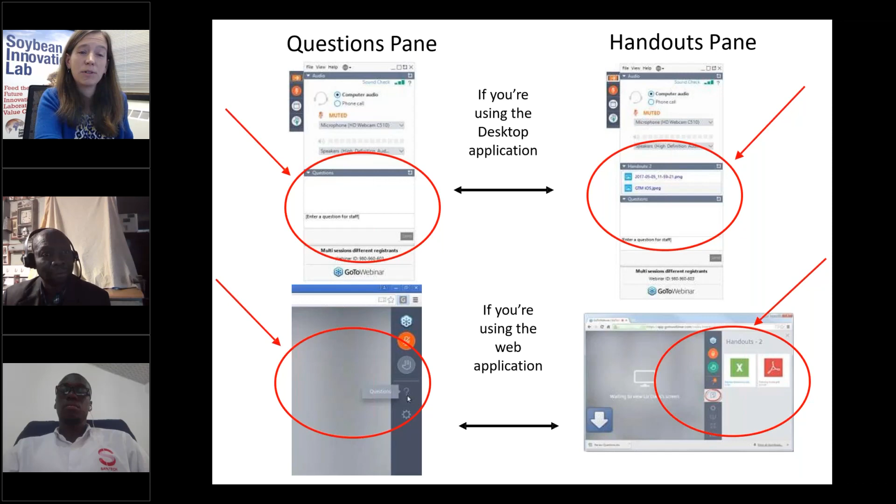Right now, I'd like to give a quick introduction of today's panelists before beginning the webinar. First, we have Mr. Jeffrey Appiah. He's an agricultural engineer and the designer of SIL's multi-crop thresher. At only 22 years old, Jeffrey is changing the face of agricultural mechanization, education, and training across Africa. He is the founder and CEO of SAYeTECH. He works with the Soybean Innovation Lab to create and provide training programs for young engineers, equipment fabricators, and vocational schools to enable the local manufacture of the SIL multi-crop thresher. Thank you for joining us today, Jeffrey.

We also have the privilege of Mr. Henry Kizito Musoke joining us today as a panelist. Henry is the CEO of Soya Solutions Eastern Africa Limited. He has over 20 years of experience working with local and international NGOs, managing human development programs in Uganda. Mr. Musoke has dedicated much of his time to working with small and medium holder farmers to increase their productivity and provide them with better access to markets. His passion for soybean as a nutritional crop for humans and animals led to the founding of his company, Soya Solutions.

Welcome, Henry. Next, I'd like to introduce you to Dr. Kerry Clark. Dr. Clark is the director of CAFNR International Programs and an assistant research professor with the University of Missouri. She has an MS degree in agronomy and PhD in soil science. Kerry is SIL's principal investigator for grain and seed quality and leads all mechanization efforts. In this role, she teams up with in-country development organizations to design and implement customized training workshops and multi-crop thresher fabrication across sub-Saharan Africa. Thank you for joining us today, Kerry.

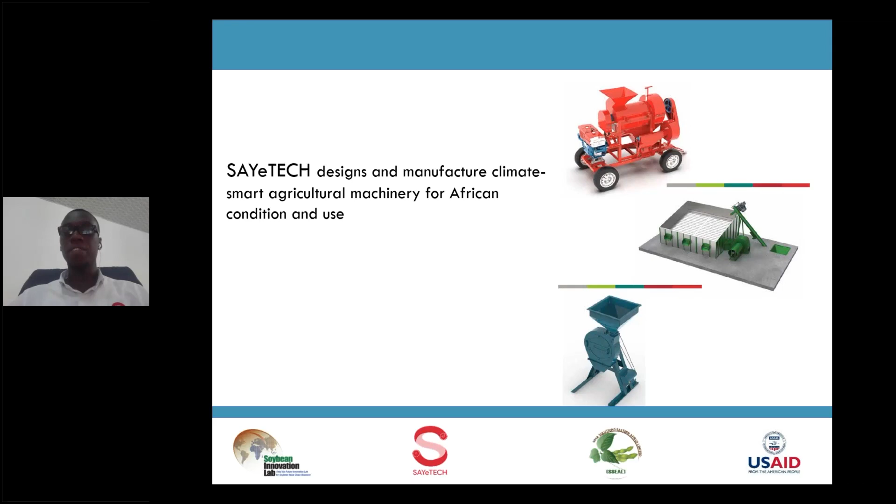So at SAYeTECH, we design and manufacture climate-smart agricultural machinery for African conditions and use. And working with the Soybean Innovation Lab, USAID Soybean Innovation Lab, we've been able to develop a number of agricultural machinery. There's a thresher, dryer, and hammer mill for poultry feed processing. And we have others in the line. Next slide.

So it all began with a passion for solution. I was in school when the USAID Soybean Innovation Lab had a competition for thresher designs, and I had a passion to design and make an impact. The goal was really to help women thresh crops. Now we have a multi-crop thresher, and that's how the SIL story began. Just a passion for solution, and then we make big impacts.

After school, after these designs, I served in a rural community without electricity, and that was where I saw the challenge firsthand. I served as a primary school teacher for one year for my national service in Ghana. I realized the problem was not only limited to women threshing by beating with sticks, but it also took away children that I taught in school to go work on these farms. The most drudgerous activity they did was also threshing, because threshing needed to be done timely due to the associated post-harvest loss if you don't thresh in time. I got the inspiration from the field to focus on the thresher and to make sure we scale it across Africa. That was one of my main inspirations.

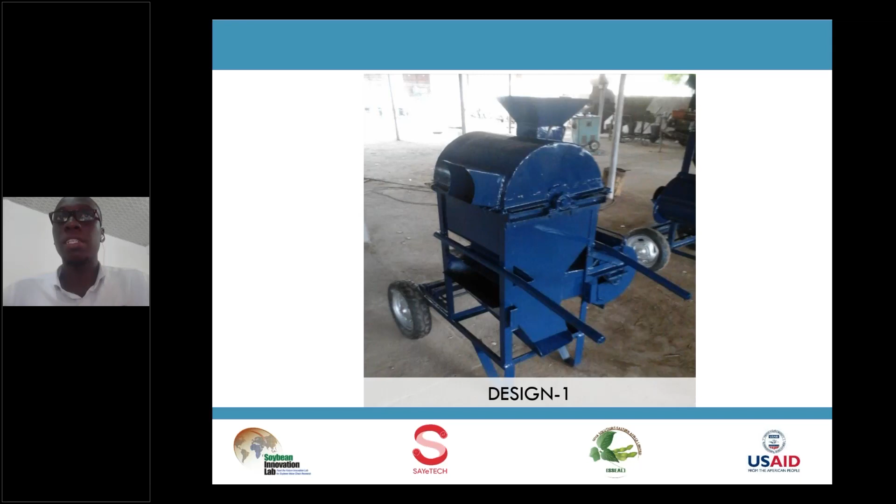So we went ahead and dropped this model and came up with the next thresher. We started with the MCT 1.0, which had a few challenges. One critical issue was that it was very fast, but it threw grains out. When we got this feedback, we developed the SIL 2.0, so it wouldn't throw away seed, but that reduced the capacity mostly for soybean. Then in March 2019, when we were testing in Tanzania, we realized that for some Tanzanian grains, which were much bigger, it wasn't cleaning perfectly. So we added an extra suction to it, and we keep developing along the chain to make it more multi-crop and more functional for African countries.

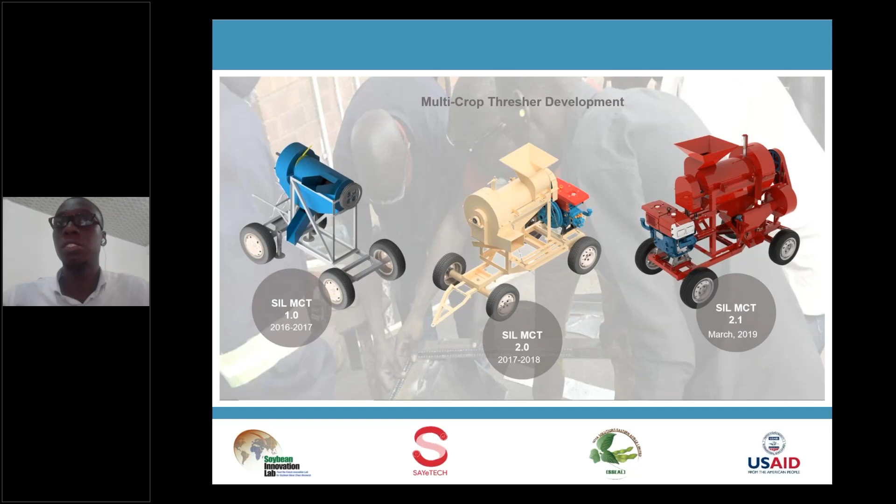Our thresher can thresh maize, soybean, beans, rice, wheat, barley, common beans, pigeon pea, groundnuts, and other crops. For groundnuts, for instance, you need to change the sieve completely to one made with rods, and reduce the threshing speed to about 200 RPM. But for it to be multi-crop, you need to change the sieves to the size of the grain—bigger grains need bigger sieves, smaller grains need smaller sieves. These are also part of the multi-crop thresher.

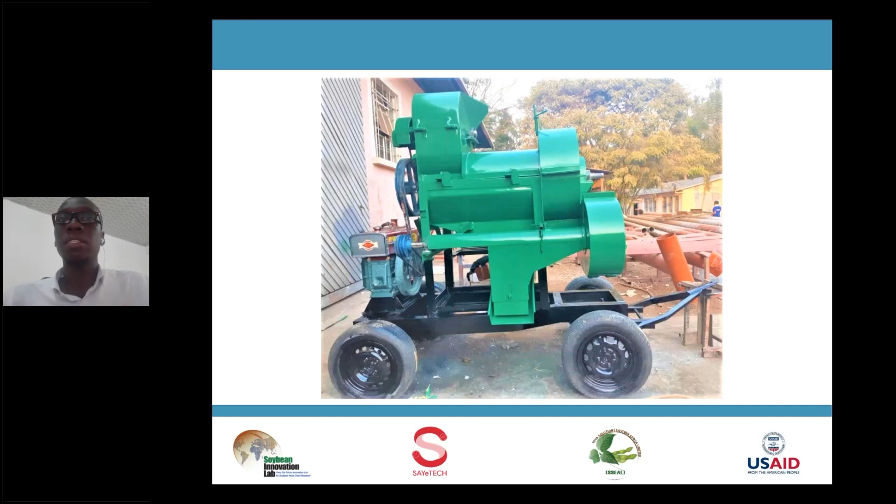Just in August 2019, we built this thresher. When we did a modification on the previous threshers, we reduced the threshing capacity of soybean to about 300 kg per hour. But we've added a new improvement in August to now increase it to about 500 kg per hour for soybean, and that's what we're currently working on, scaling it up shortly. This is the current design coming to the market, and it's what we're using for the trainings.

So the thresher is about 2 meters tall, 1.65 meters long, and 1.1 meters wide. With this, it's good enough for medium to large scale farmers, and can be pulled easily with a motor tricycle.

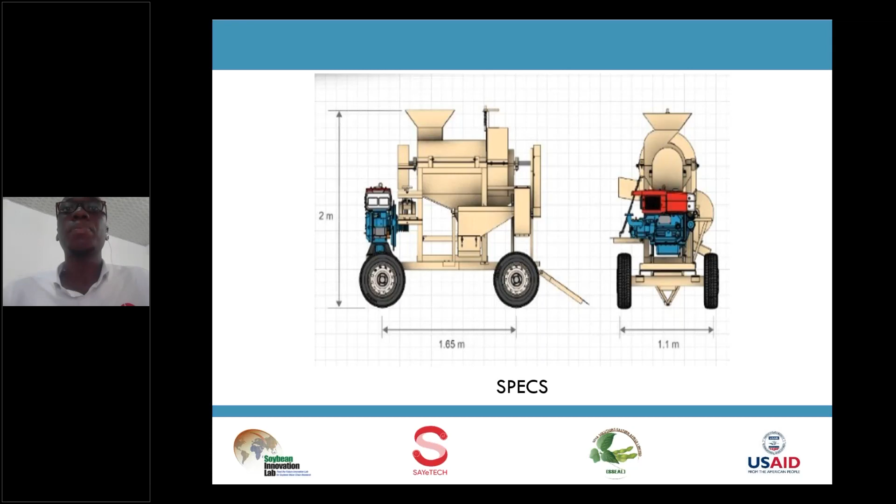So our thresher is powered right now by a diesel engine. We care about sustainability a lot, but this is the solution we have now. We're gradually moving from here. But it's also powered by just 2 gallons of fuel for an 8-hour run.

And for maize, running on the minimum speed, the least speed possible, you should get about 1.5 tons of bag per hour. And for soybean, it's 300 kg per hour. For sorghum, rice, millet, it's about 1 ton per hour.

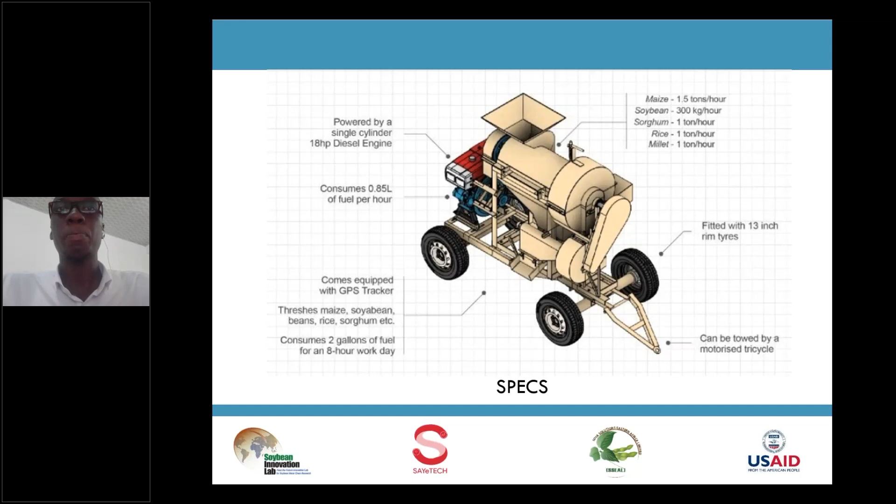Looking at our functional parts, it comes with an engine, which is an 18 horsepower engine as said earlier, and then the feeding of the crops is done through the hopper up there. Right now it comes with 2 sections.

So we have the very first fan that, after the crops are threshed, cleans it well, and then the secondary section also does extra cleaning to make sure we have very high quality grains that meet market standards and are easily purchased by buyers.

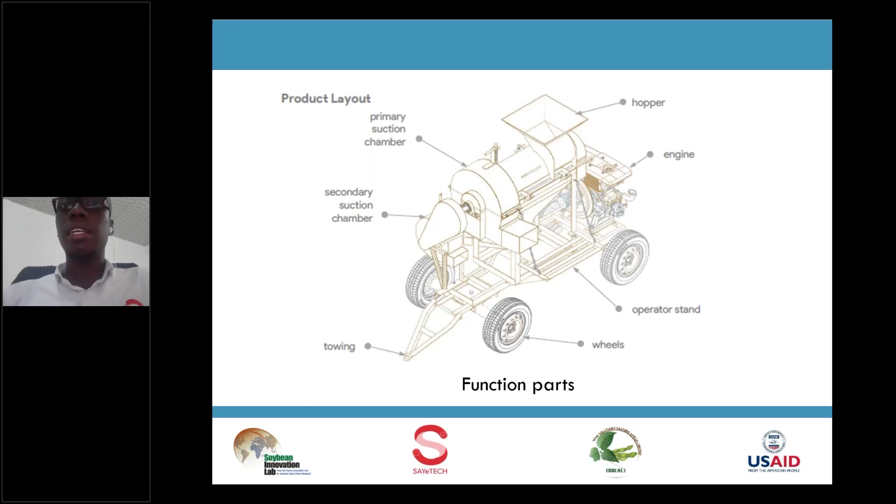So we have on point 5 the tow. Our thresher is towed by a motor tricycle, can be towed by a motor tricycle, and easily be put to wherever our farmers are.

If you look at point 3, it's where the operator stands to feed into the thresher pretty easily. And with this, the youth that operate these machines are our targets, so we design it according to the average height of the youths across Africa.

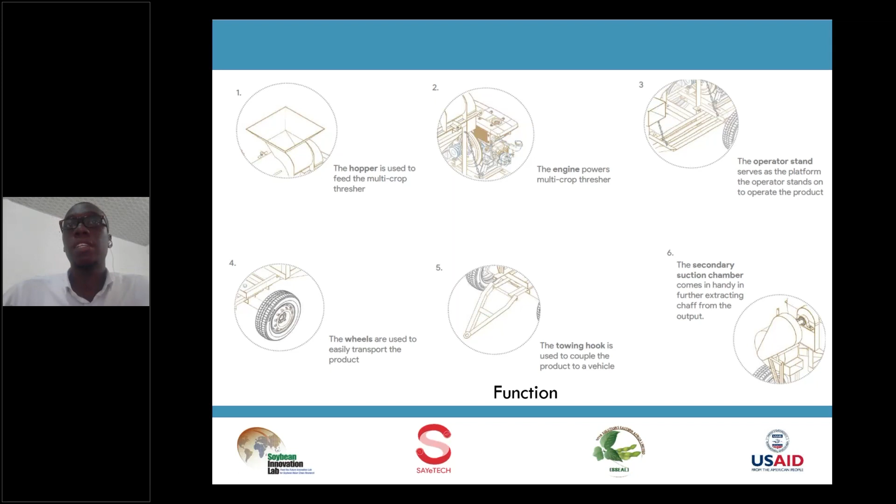So if you look here, you would see the suction adjuster. One thing we have done is that when you are doing different kinds of crops, you would need to adjust the suction, because with some amount of speed, you may lose seed. But with this adjuster, you can close it up to have up to 0% loss of grain through the suctions.

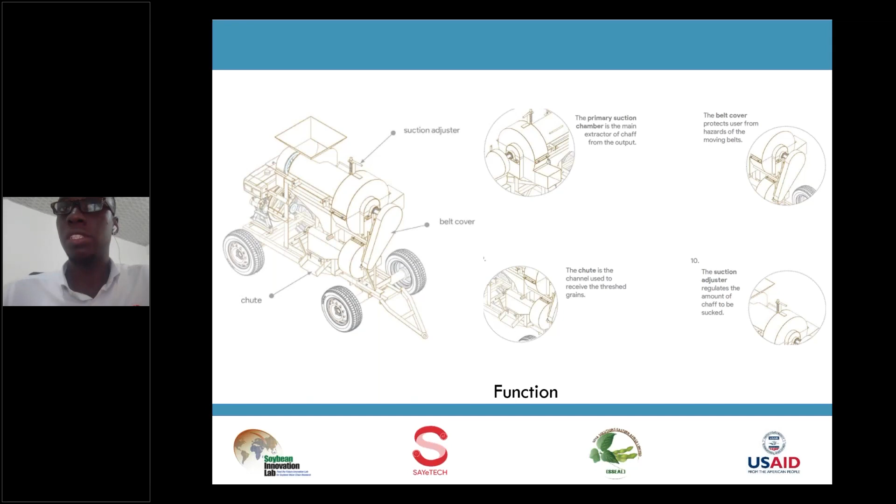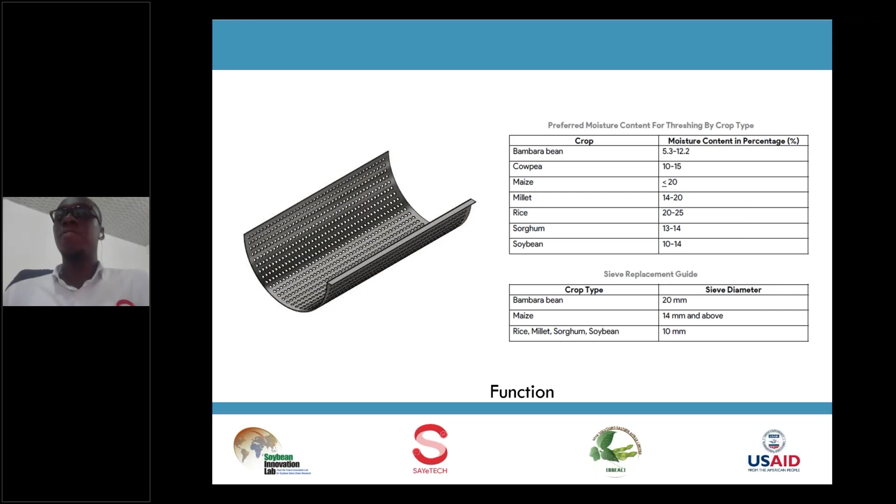As said earlier, we need different concaves for threshing. But another critical thing is the recommended moisture content for different grains. So these are the moisture contents that are recommended. However, we have done test trials, especially with maize that was over 32% in moisture content, and it did work perfectly. But these are still what we recommend.

Also with the sieves, as I said earlier, the bigger the sieves you use, the bigger the holes for the grain. So you could just look at the grain and say, hey, my grain looks big, this bigger sieve would do. So the sieves that come with it, you just select for it. And for maize, typically, we go with a 14mm sieve.

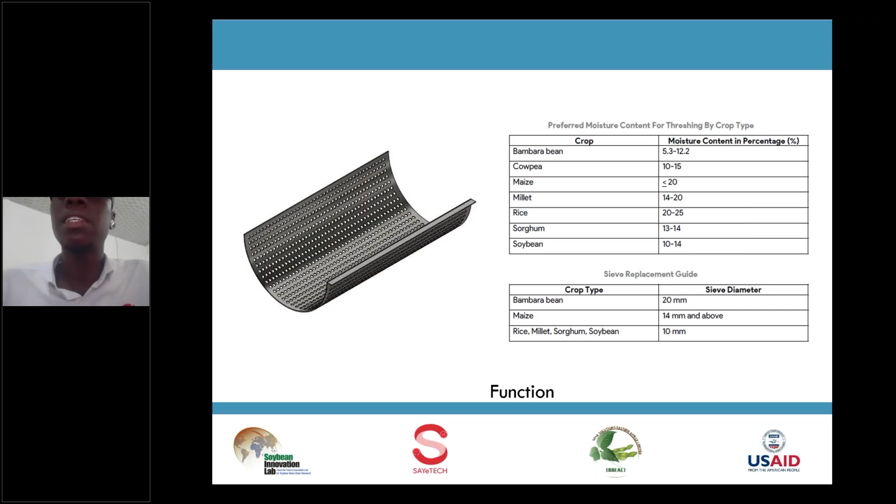Soybean is 10mm. So I spoke about our new addition to add on for more feed, and this is how it looks like. Very soon, when this is ready, farmers would be able to do about 500 kilograms of soybean per hour, and hopefully even reach up to 700 kilograms of soybean per hour, creating more food and bringing more nutrition across Africa through soybean.

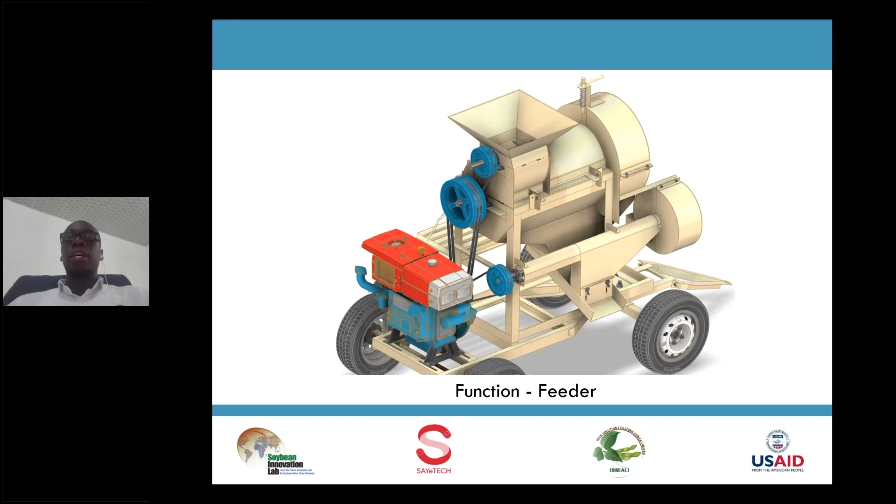So at SAYeTECH, we have a production, and I'd love to show you our production now. So this is how our machines look like when you purchase from us in SAYeTECH. We focus on quality and standards, so we make sure that we use the right materials for durability and for the African context.

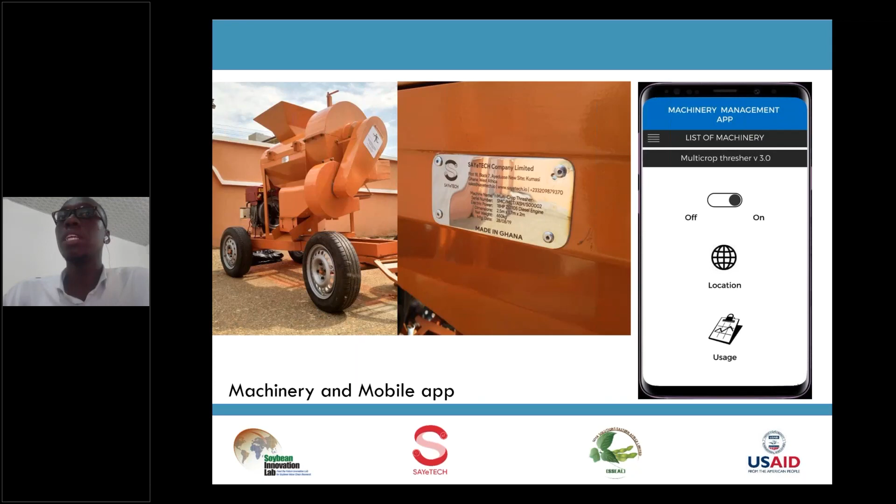We also have an app that is designed for the service provider, because we know that it's the service providers that we reach to who form businesses with these threshers and reach out to hundreds and thousands of farmers per season. So we are coming up with this app for them.

Now with this app, the service providers will have very good control of the machine, to be able to turn it on and off, to find its location, and to find its usage data. The data will be the first real yield data collection across Africa, and we'll be using it to track grains so that we can know, putting in AI, the trends of agriculture in Africa in terms of productivity and in relation to mechanization.

Now, this is also a very good tool to engage a lot of youth in the cities to be involved in agricultural mechanization and to promote agriculture across Africa, and helps the youth to work back with farmers.

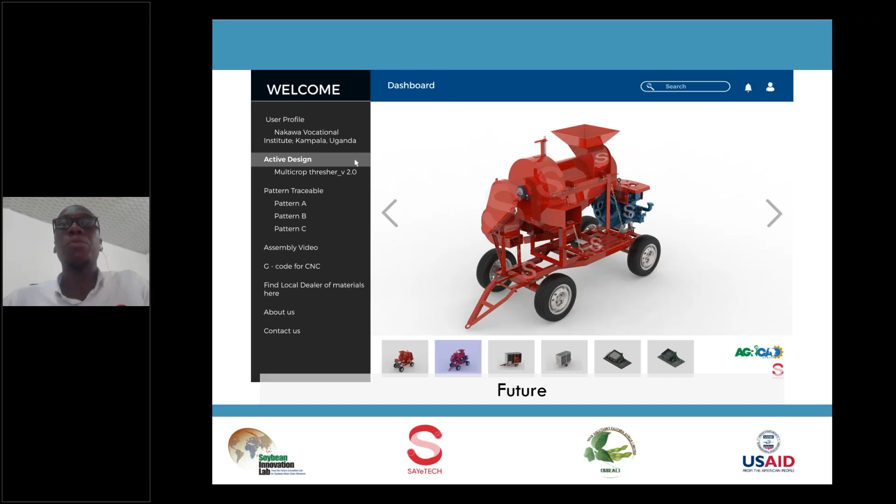In the near future, just as we've done with the Soybean Innovation Lab to do trainings, we want to come up with a web app that will teach a number of youth, specifically youth in technical schools, to be able to build agricultural machines of different kinds, like the thresher, dryers, and others. This we hope to do shortly, and will launch shortly.

By 2023, we envision to have manufactured 1,522 threshers, and we will have threshed over 1 million metric tons of grain, saving over 250,000 metric tons of grain that would otherwise have been lost. In jobs, we estimate to provide over 14,000 jobs in both service provision and manufacturing for the youth across Africa.

And we go back to the basis where I got the inspiration. We estimate to have saved over 300,000 critical school days for our children in Africa, knowing that they'll be in school to create a better Africa. Above everything, we will have liberated over 10,000 women and children from the most drudgeous activity of threshing.

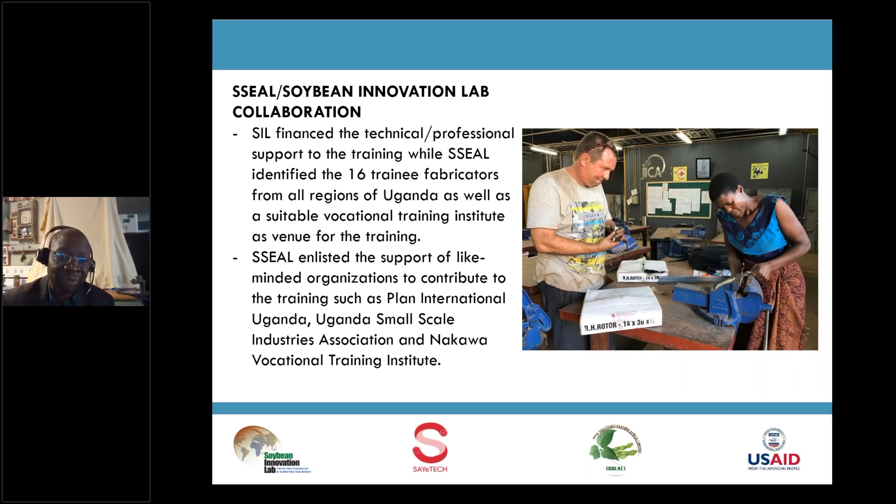So during the 6 days, as you can see, at Nakawa Vocational Training Institute, we actually produced 3 threshers, prototypes. We call them prototypes. And by January, February, they were ready for testing, for the second harvest in our country.

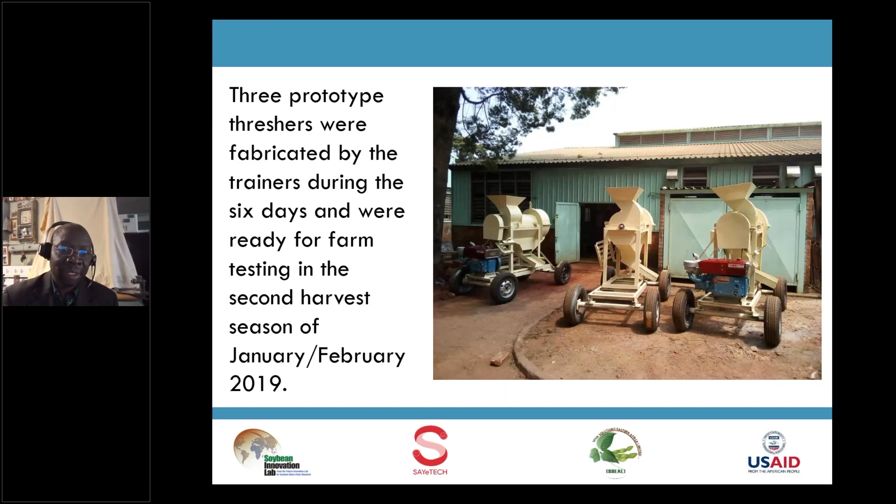Our country has 2 growing seasons. So we have the major season being July to August, and then a slightly smaller season in January, February. So that's when this thresher was ready for testing.

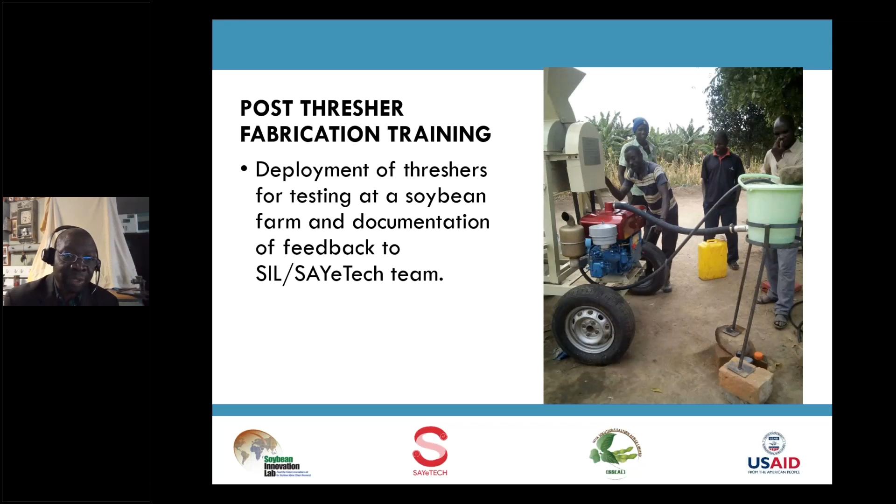When we deployed one of the threshers to a farm in Mbarara, we received feedback, and as you can see, it was actually being used at that farm. It is that feedback that has fed into the modifications SAYeTech and the Soybean Innovation Lab have made, and we should be able to have these changes instituted on the prototypes and the orders that have been received.

So what is the way forward? From the experience we've had in the last 9 months or so, we think this is the way we should move forward. One, we must maintain the thresher as a business for service providers. We must make sure that if it is a business, they'll be able to pay back in case they borrow money to buy a thresher.

We must maintain the quality of materials recommended by the inventors and the Soybean Innovation Lab, and that means the cost will be constant, given that materials are fairly pricey in our part of the world. But for us to maintain quality, service providers must look at this as a viable business for them to take risks.

We must create demand through aggressive marketing and analyzing situations in various parts of the country, then provide business planning support to the trained fabricators, which we are doing through the association. We are establishing linkages with financial institutions in Uganda, microfinance, banks, so they can look at these threshers as businesses and support thousands of young people or business people scattered in the country to acquire these machines and provide a service to farmers at a fee, with a multiplier effect on quality and eventually competitiveness of our grain, not only at our factory but also within the region.

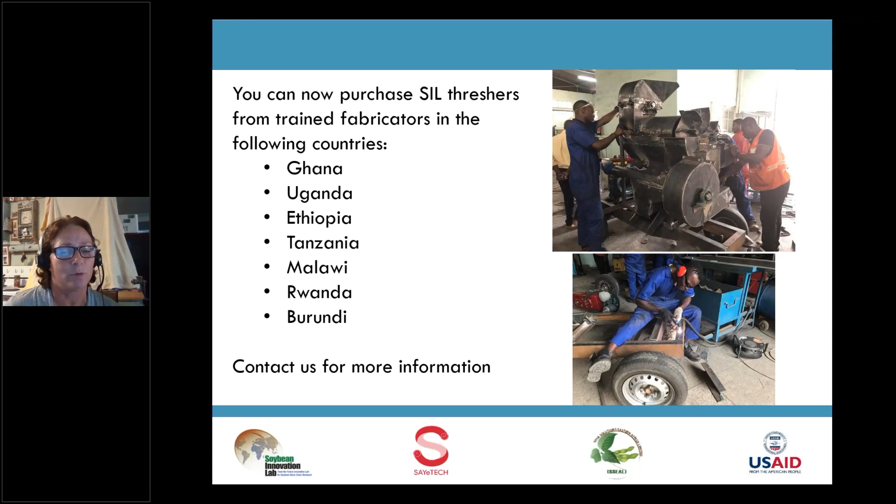We have found that in some countries, especially the landlocked ones, particularly Burundi, materials were extremely hard to find. Where you have better sourcing of raw materials in a country like Uganda or Tanzania, the price is a little bit better. Compared to imports, the price of the Soybean Innovation Lab thresher averages around $3,500, while a comparable imported thresher will average around $8,000 US.

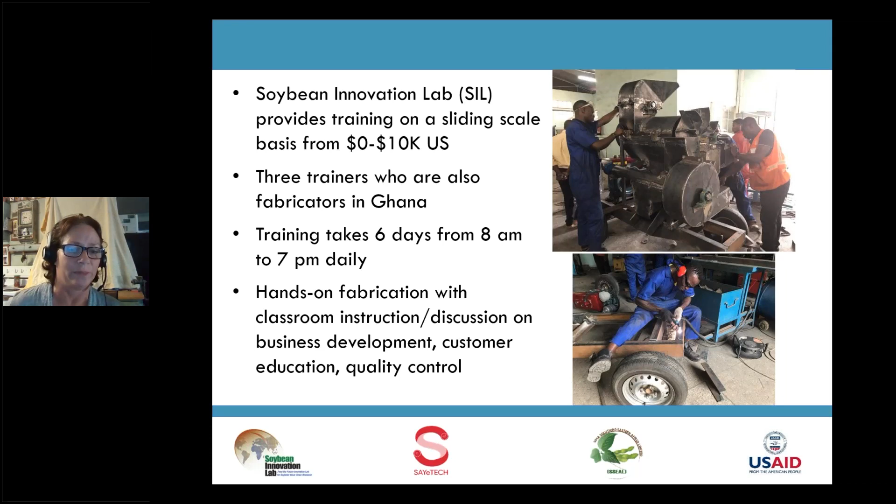We team with a host organization. Henry already told you about his experiences as a host organization. There are several things the host organization must do. The first thing is that they recruit the participants. We can have anywhere from 10 to 20 participants, and we've had even maybe up to 30, which is a little more difficult, but 20 is probably the ideal number.

When they recruit those participants, we recommend that they look for fabricators in their area that already have some experience making ag equipment and have some contacts with farmers. A lot of welders in parts of Africa may only be making things like doors and windows, which is the big product for most welders. It's a little hard to take the leap from that. It's possible, but it's a lot easier for them to be successful later if they are familiar with agricultural equipment and know farmers that can become customers.

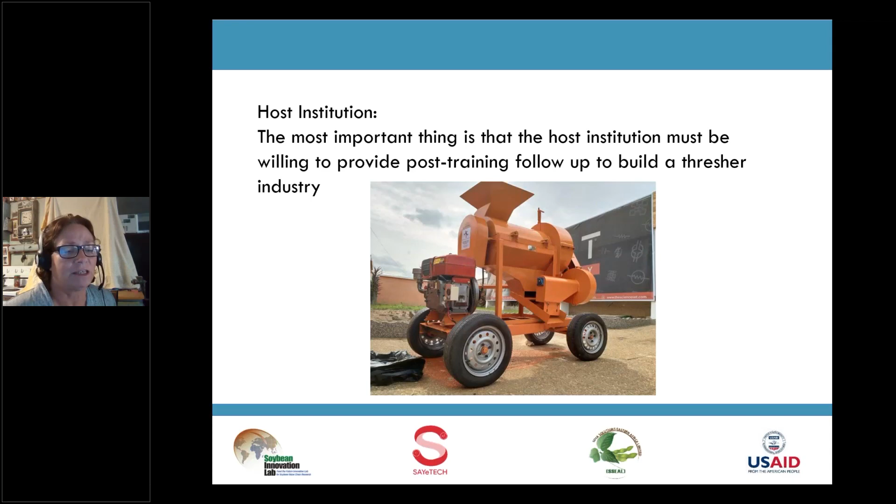The most important thing the host institution does, though, is be willing to provide post-training follow-up to build the thresher industry. Henry went over that nicely, describing what they're trying to do in Uganda. It's not enough just to come teach people how to build something and then leave. There has to be somebody on the ground willing to put in the effort to connect and make it actually work.

That post-training follow-up to build a thresher industry can include connecting service providers and farmers to the fabricators. Sometimes the fabricators are in the city while the service providers and farmers are out in the country, and you have to make those connections. One way is to invite fabricators to demonstrate at fairs and events. Maybe the host organization would help transport a thresher to a field day in a rural area. Henry also talked about financing and how important it is to connect both the fabricators and end users to financing.

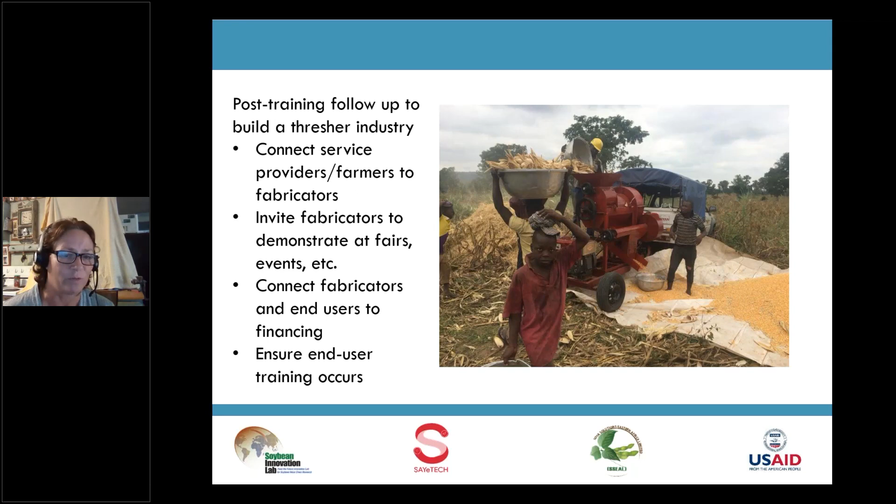For me, training is incredibly important. You can't send a thresher out the door for somebody to use if they don't know how to use it. So you have to have good training in operation, maintenance, repair, and even a bit of business development. Some host organizations will not only work with the fabricators but go on to work with the people who become service providers to make sure those are successful businesses.

Henry also mentioned you need to do post-fabrication training follow-up by testing your threshers. We can build one to three threshers during the fabrication training. Those then need to be taken out and tested for your crops and conditions. For instance, in Tanzania we found CIAT was working with common beans. That was new for us because in West Africa you don't see many common beans. We found we had to make modifications for it to work better with common beans, because beans break easily in a thresher. So we added a secondary suction fan for chaff cleaning so we could slow down the threshing drum and the beans wouldn't break. Now we respond to all of your feedback and provide crop-specific modifications, and we believe we're at the point where it does very well with every crop previously mentioned.